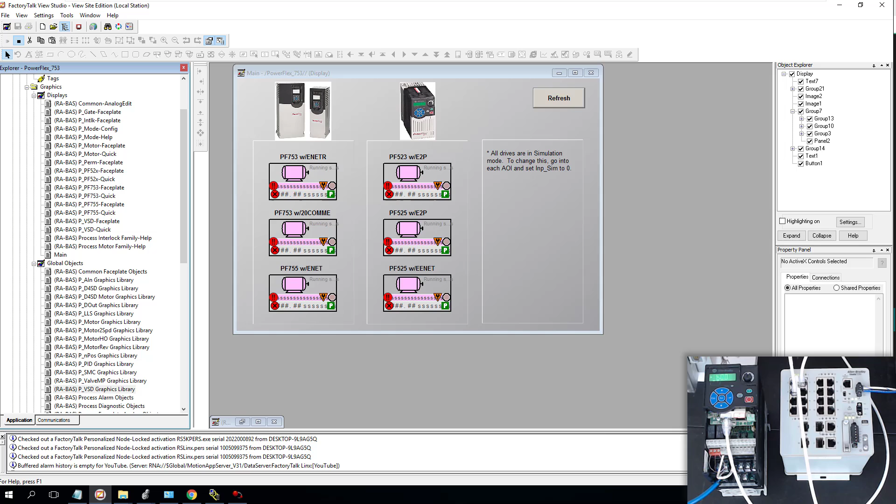So just to show you a couple different things, we're going to come into our program here and I'm going to show you how I synced everything up. Okay, so this was a demo that I got from PlantPAx, and I've tweaked it a little bit, but I've also kept it as the same thing you can get from Rockwell, and that way you can be successful at doing this as well.

So what I want to show you is I've basically disabled the rest of the drives that we were not using. I've tested it on a PowerFlex 755 as well, but I'm doing this now on a 525. Right, so the PowerFlex 525 that we're using, there's a couple different variations. We are using the EENET, so that is what the tag name is, and I want to show you how you get to sync this up.

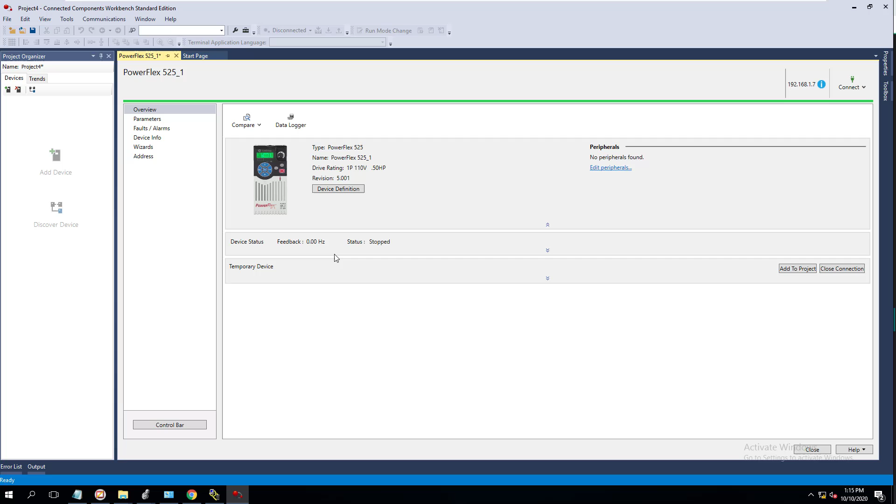And a small comparison that you might or might not be familiar with: in Studio 5000 Logix Designer version 32, if you pull up the actual device properties, you see it kind of looks like CCW, Connected Components Workbench. Why do I say that? If you've seen the last few videos I did, we actually set up this drive in Connected Components, and we do that because of the peripherals and the variations. So it no longer works so easily with Drive Tools or Drive Executive.

So now the program came in as a PowerFlex which is rated at 480. And of course, our trainer here is just a 110 trainer, right? So we have a simple PLC, simple 110 scenario, nothing fancy. So we do have a 110 drive. So how do I sync that up?

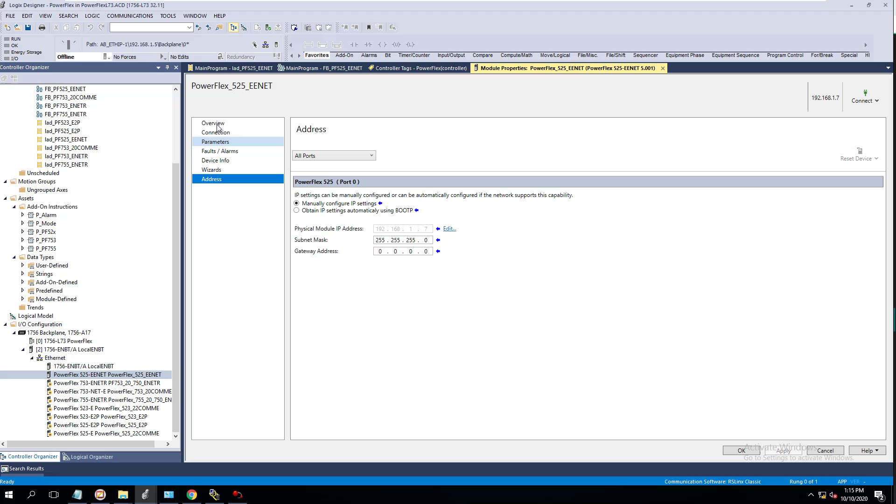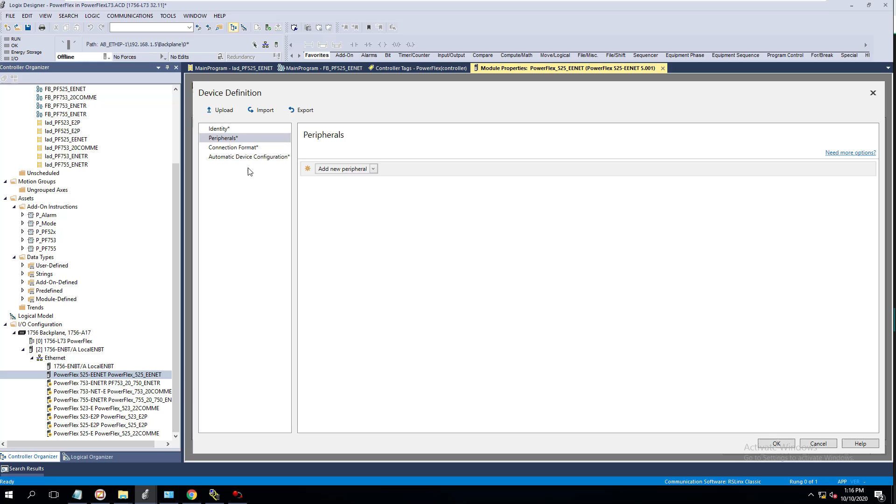A lot of people would think you just go in here, change a couple things, and maybe it would sync up. Well, if you go right here and you edit peripherals, you're going to go into peripherals and you can upload. So when you upload, this is when you connect, and this is how you drive match. Right now you have to do this offline; you can't do it online. But the cool thing too is you can enable ADC, which is your automatic device configuration.

Now you can enable this where, first you have to set up all your process directly into your ControlLogix processor, just like we're doing right now. We have to sync everything up, and later down the road the drive goes out, right? And we plug the drive in, and when we change the IP address to match the IP address that we have in our configuration, the program would automatically prompt us to download to the actual drive.

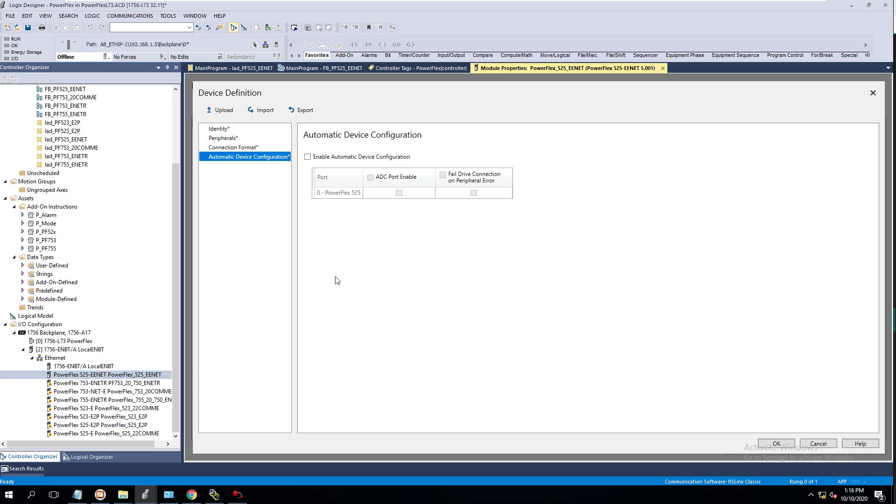Now we're not going to do all that. We just want to briefly talk about this and how to set it up, and definitely how to do the upload and import, export. That's pretty obvious, but I thought it was very similar, the look and feel of the way things are. Now I bring all this up to talk about the tag structure.

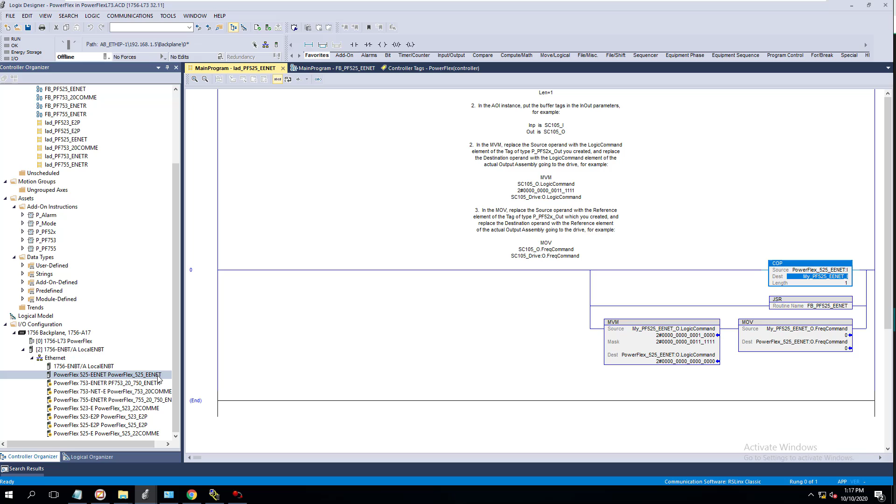Okay, so you notice the tag structure down here is PowerFlex_525_EENET, right? So the two files that we're going to be pulling up are the PowerFlex 525 right here, which is a function block, and this is to work with the AOI that works with PlantPAx. This is the PlantPAx AOI. Okay, so this is the name of the actual. You have to first give it a name.

This is the name that they currently are using, which is my PF525_EENET, right? And then they're using the data type, which is right here. Now, what is that data type? That data type is an add-on instruction that is implemented with PlantPAx.

So the rest of these, just note that this is your top level. This is basically your tag name or your device name for that specific device, in this case the drive. This is the drive's name. We can change that name if we want and name it something else, but in this case we're going to keep it the same name as what it is.

And the next section is the input and output. So the input right here is going to be a data type. Now this is just a data type. If you broke down your user defined, you could see your inputs and outputs right here. This is the user defined data that comes along with and works with this AOI. So I say all this to say that this is what's needed for the actual drive.

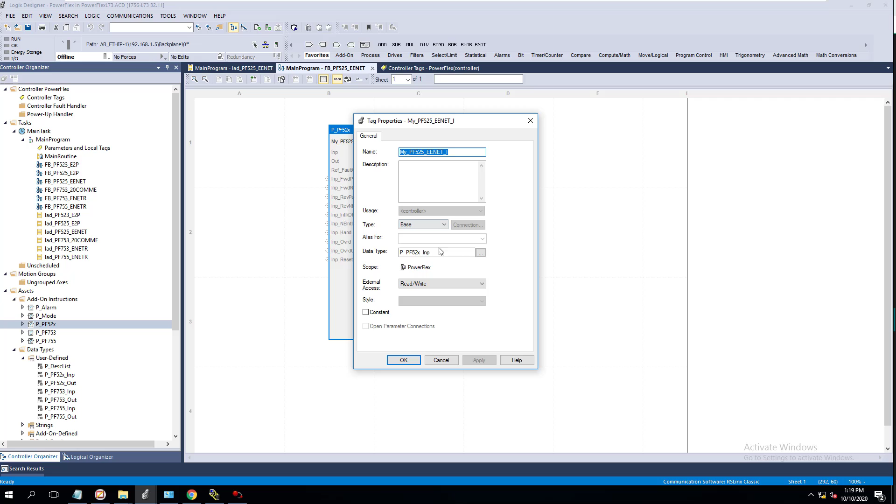Now, the reason the formatting is done the way it is: you have your tag name for your actual device, you have your input, right? You edit that, make sure you do your correct data type. You have your output, make sure you have your correct data type. And then you have your fault list, okay? Your fault list, again, is going to be another data type.

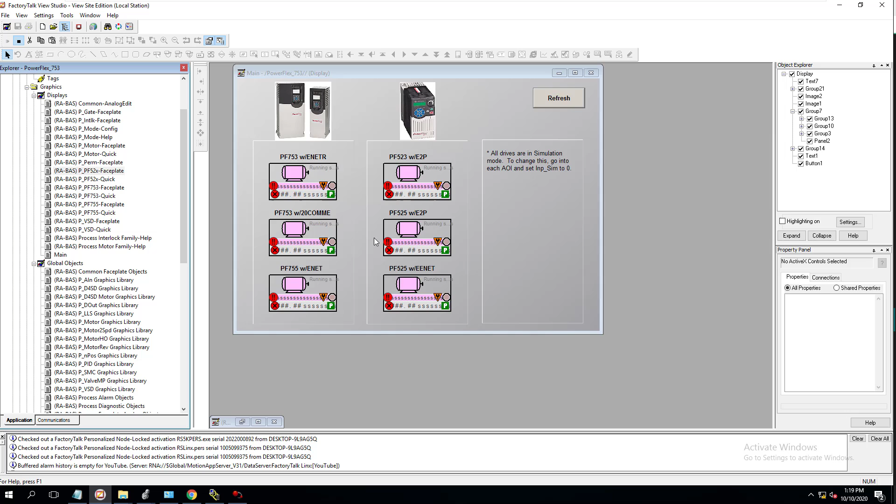Now, let me jump over real quick and show you how all this is linked together with the actual device, because that's really where the key focus should be. So how are we making this block talk to this drive, right? So that it can work with this block to make it work with, I believe it's this block right here, to make it work with this block, which I have down here.

So again, you have to understand how all this is working together so that you can actually get that functioning. Now, again, it's breaking down the components and understanding the way the structure is so that you can actually understand how to implement this to get this successful.

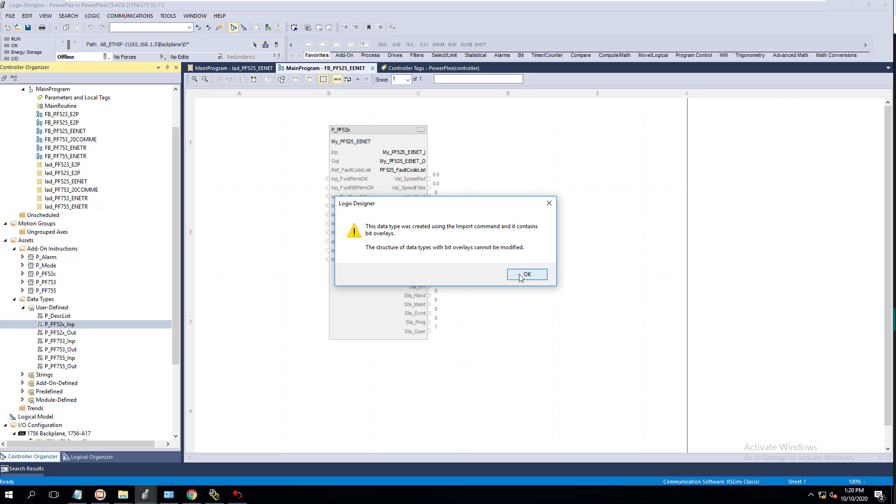Now, keep in mind, we talked about the two input and output parameters, right? There are the tags that we need. If we looked at this, we looked at their tag structure. This tag cannot be modified. That's all they're telling you, is it cannot be modified.

This is the tag structure that comes with PlantPAx, and you probably could hack it up some way and modify it, but I believe that works really, really well with what they have right here, and that's probably the reason. So if you look at this, there's supporting logic over here, supporting logic in this rung, which is a ladder logic.

Now, I bring this up for the simple fact of this tag right here, which is the PowerFlex 525 EENET, is right here. So you're going to copy your device parameter, or your inputs, your status word, into your actual tag that you made up here. You're copying that into there. That's where that transition happens.

And if you looked in your actual I/O and you looked in your tag structure, which all I did was open up my controller tags, you come into your controller tags, you would drop down and you would find where your I/O is. And how you would understand that is you could look at your data types over here, and you could see the data type. Now this is an AB PowerFlex 525, and it gives me the input and the output, right? So this is the drive status, right?

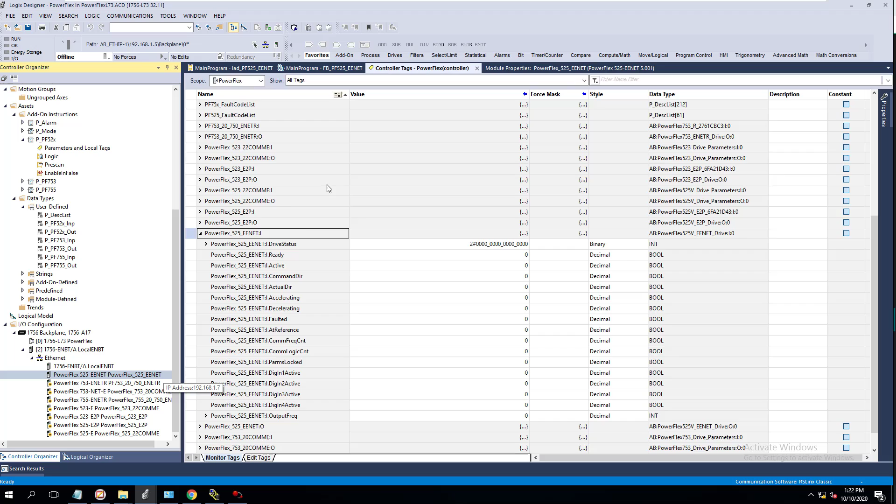And the drive status, right, that's when we synced everything together. When you see me pull that up right here, we synced everything together to make sure it was right. So you get that when you get the tags right here. You get your input and your output, two sections. Okay, so let's talk about your inputs.

You have your input word status, right? You have your 0 through 15, which is your 16 bits of input word. You also have your ready bit, your active bits, your command, your actual accelerating, decelerating, all of the bits you need, and your actual output frequency, which is basically in decimal form. At that point, this is an integer. You can see these data types over here.

The output word, again, that's going to be your command word. Now you can control a drive from your command word, or you can control it from your start, stop, jog, clear, and all the presets and accelerations and stuff like that. And this is also your frequency command, which again is an integer form that goes out to the drive.

Now, why do I bring all this up? I'm bringing all this up to show you the transition where all this ties in together, right? Because if you don't know where it all ties in together, then you're not going to be successful.

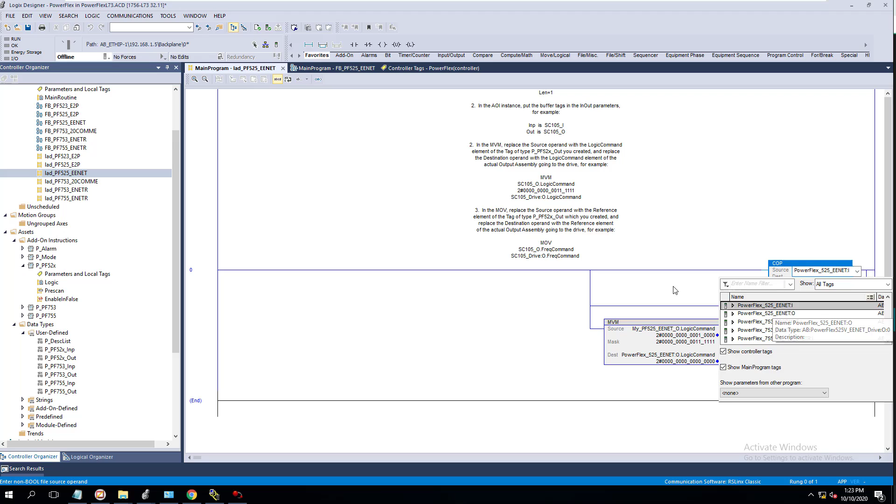So this line of code right here is very important because this ties in the inputs of the drive that we just got through looking at, ties in the whole input status to that my PowerFlex or my underscore PF 525 underscore E-ENET underscore I, right? So that's the tag we actually have in this function block.

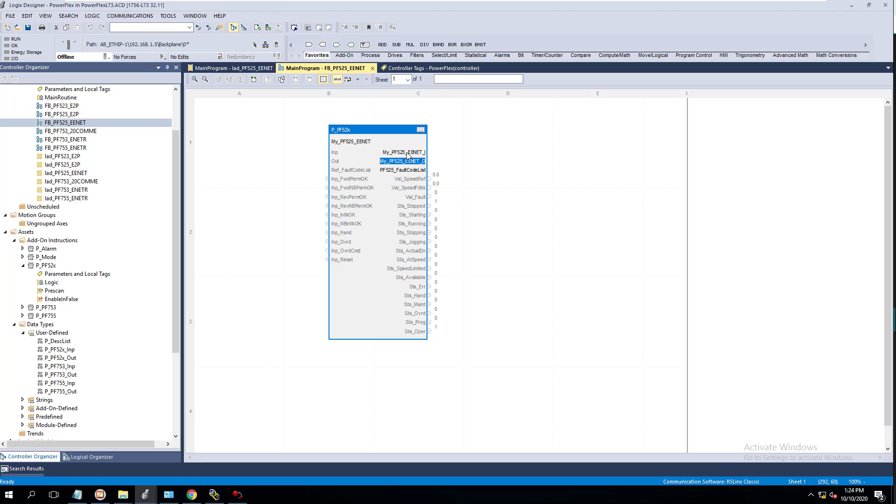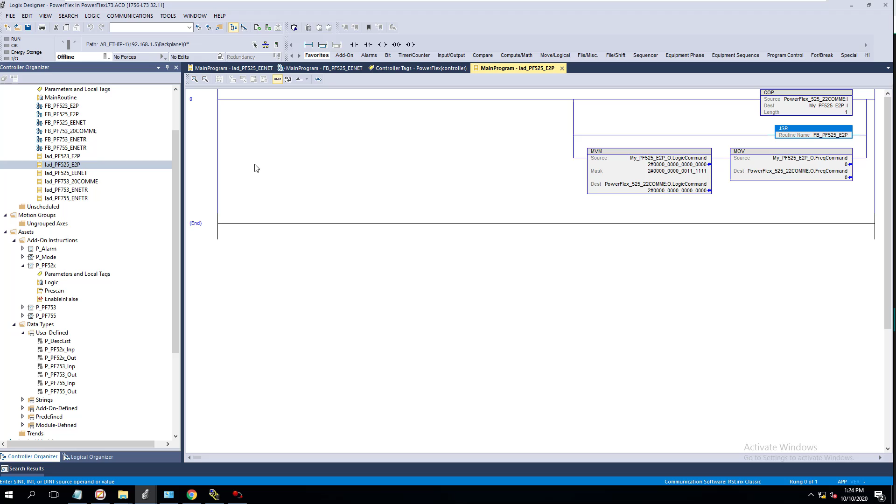So that's the tag we have right here in the function block. Now in the ladder logic, we're going to show you right here. This is just a JSR jumping to that, and I actually pulled up the wrong one, so excuse that. Make sure you pull up the right one. Again, you've got to understand they're trying to give you many examples right here. So this is the JSR jumping to that actual function block up here.

Now this is going to be your mask move. In the PowerFlex 525, you have to do a mask move, or normally you would just do a move. Like in a PowerFlex 755 drive, you would just move your word into the other word, right? You would move your command word into your command word, and you would move your frequency into your frequency, just like they're doing here.

But in this scenario, they're doing a mask, and they explain this in this situation up here. Basically, they're talking about a mask move, and the reason you mask move is broken down in the documentation of the actual drive. But in conjunction with this, all a mask move is, is just a filter. So what are you paying attention to?

In this case, what we're paying attention to is bits 1, 2, 3, 4, 5, and 6. So in this instance, all we care about in paying attention to the mask, or the command word of the drive, which is the start, stop, reset, clear, and all that, is the first 6 bits, right? So think about that. Now that's in the command word. So that's completely configured differently.

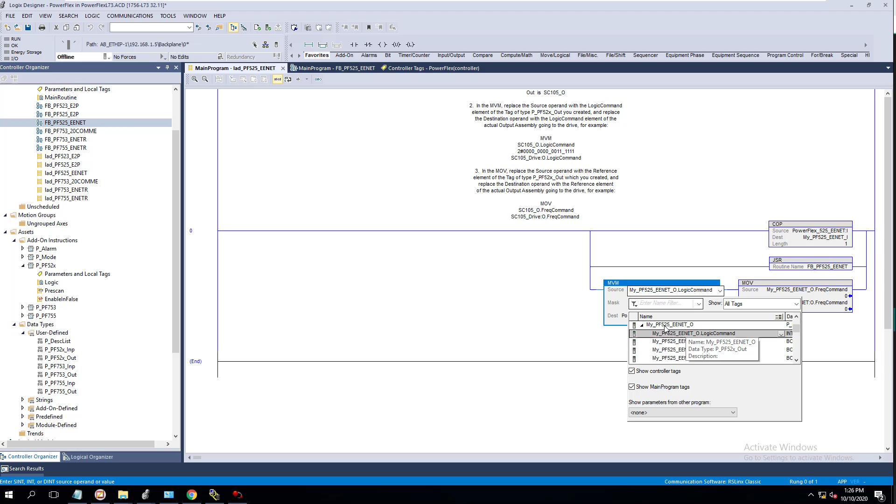So I say all that to say that when you're doing this, the output command, right? If you look at this tag, this is getting the output command coming from your function block over here. So if your function block is right here, this right here is going to be your logic command. That's where you're getting that, you're getting it from that tie, right?

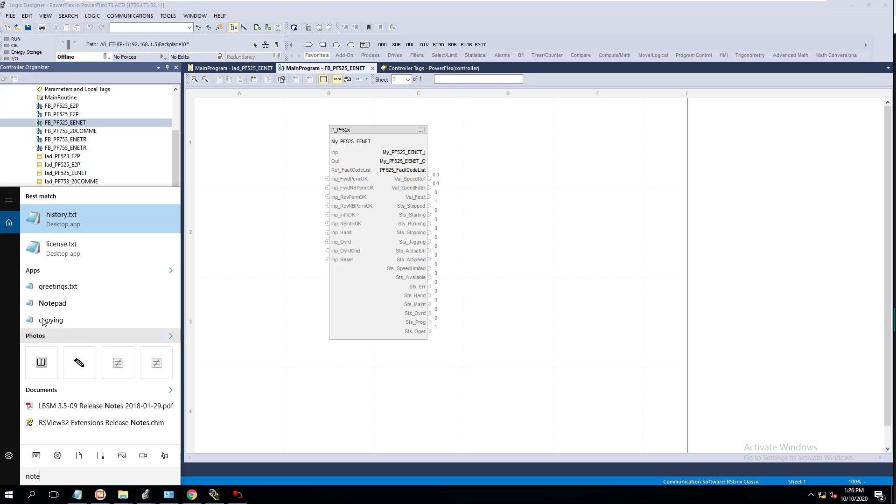So if you think about the way things were talked about, and you think about the way things are, now how are we getting our connection? Now this is very important, and I know a lot of you guys may already have this, and some of you may not, so I want to make sure that this is 100% clear.

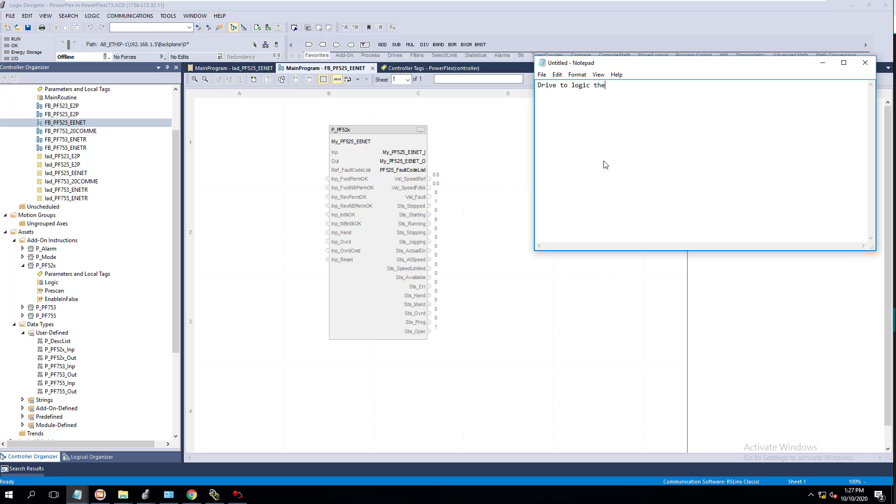So your drive to logic, then to HMI, right? Understanding the way that the tie works together, so in our case, we're going to the I/O, right? The I/O to ladder logic to function block to HMI.

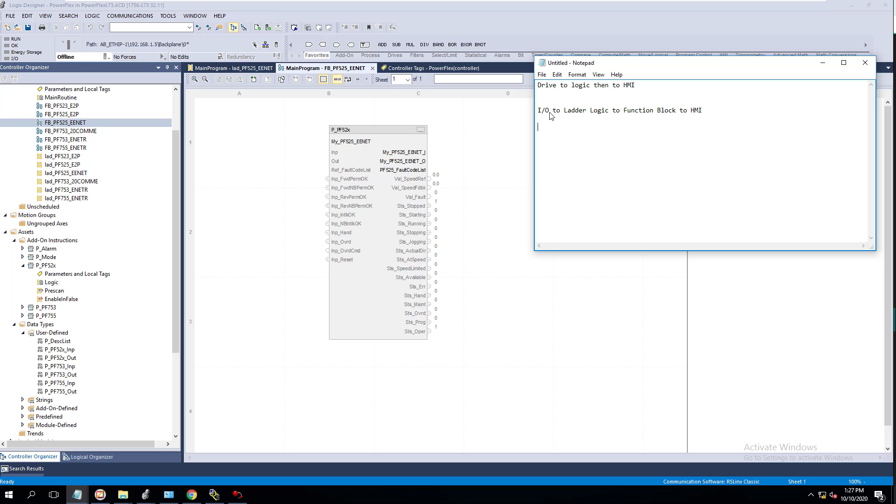And I'll explain this, this is the reason why I wanted to actually talk about it, because when you spell it out like this, right off first glance you're like, well, that doesn't make any sense. But it does. If you think about the way everything we just talked about, the ladder logic ties into the I/O, which is down here, which is our drive, which ties into this function block, which ties back into the function block, makes the tie back to the actual drive.

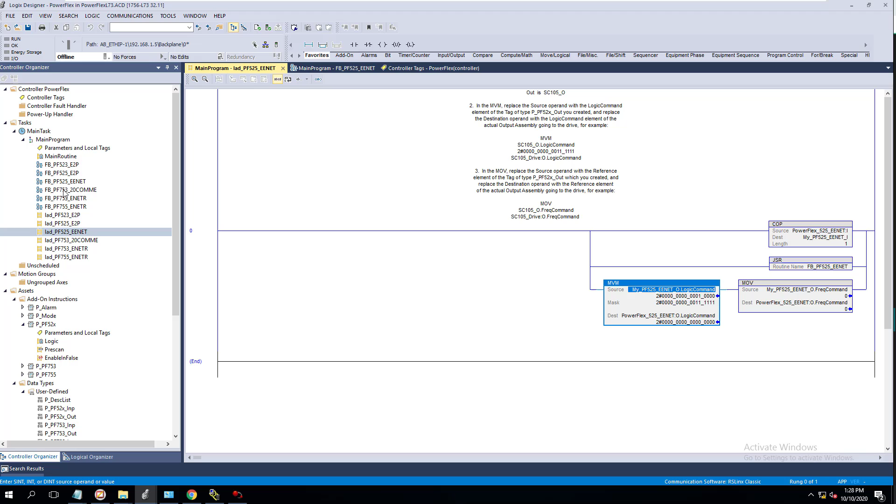Then that talks to the function block, which is what talks to the actual HMI. Okay, so let's actually download this so you can see some action.

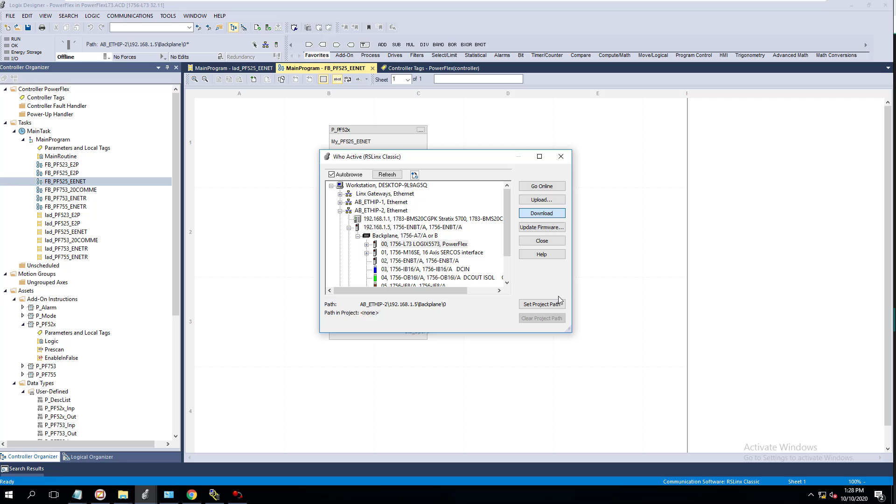First and foremost, we're going to come in here and download this to our application, which is right here, and we're going to download it, and then actually run the application. I'm going to show you the way the application works.

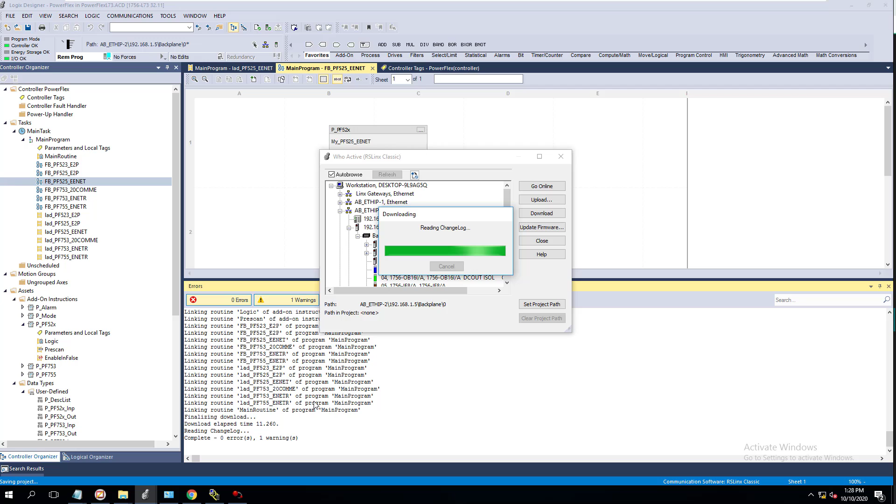Okay, so it's downloading right now. You can actually see the drive is faulted out, but no worries, we're going to reset the drive when we crank up the HMI, because it will fully work with PlantPAx. And that's the goal here, to understand how you're doing it, but also to get it working.

So with all this said, now we have our program in here, we have our drive. Now what we need to do is come into our HMI system over here. First and foremost, you need to make sure your communication path is right.

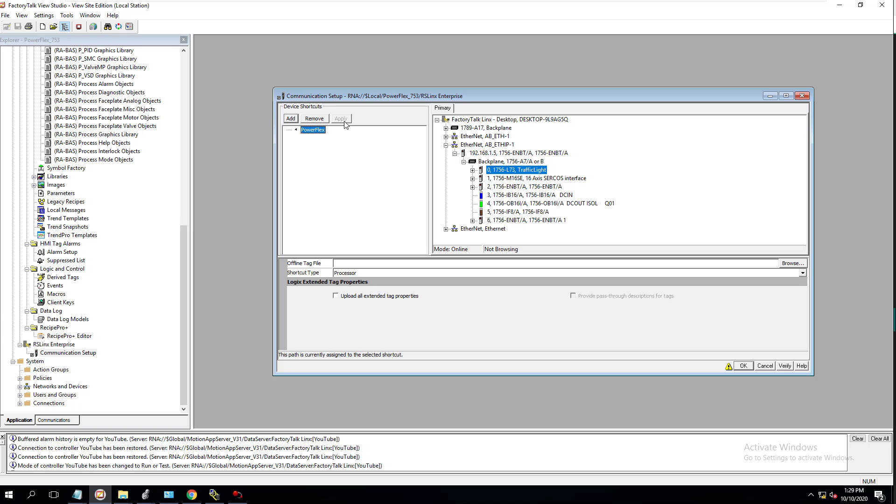So our communication path, again, we set our shortcut is already PowerFlex. Our communication path is going to be right here, which in our case says traffic light because we did another trainer on traffic light, but sometimes there's a little cache in there that keeps that. No worries, it doesn't matter. You just hit apply right here and make sure you verify this. When you verify it, make sure the path is right and hit OK.

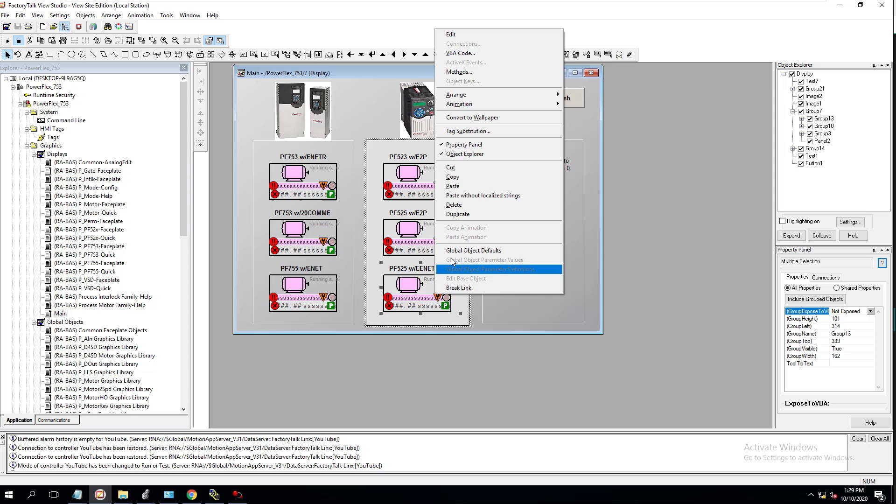This gives you the ability to sync this up. So say if I wanted to open this up and come in here and actually replace a tag, like a tag substitute or something. If I wanted to tag substitute one of these, then I could come over here and refresh the tag, and then my PowerFlex online would come in, and you could see I can pick from my tag database.

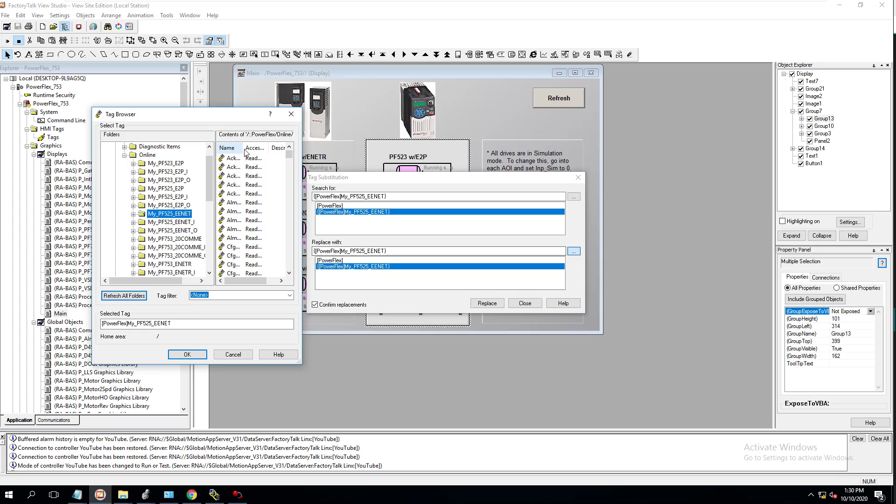So in this case, my PowerFlex, my underscore PF 525 EENET, this would be right here in this case, and then that's what it's actually looking for, right? So that's what we would put. Now I'm just showing you an illustration because I've already done that. I'm trying to show you the connected pieces and connected components so that you understand the way this works.

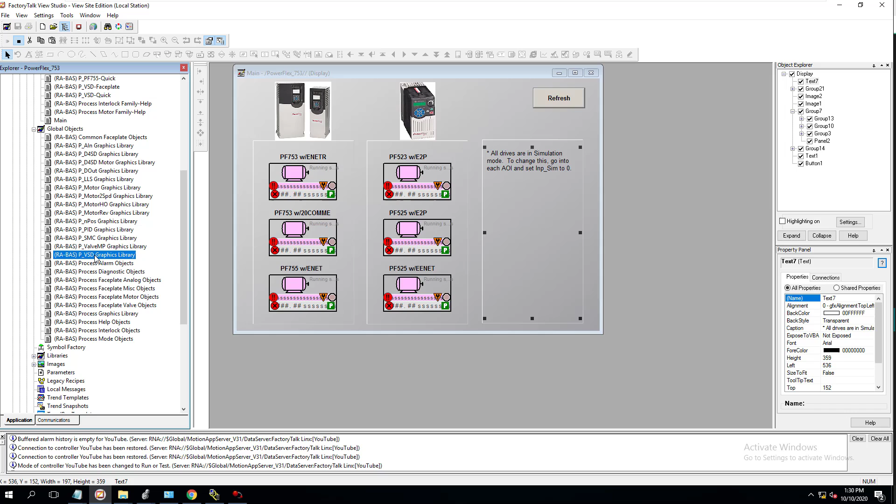So you're probably wondering, well, this was pre-done, so how does that work together? Well, that's a very good question, because you come down here to your P_VSD Graphics Library. This shows you the breakdowns, okay?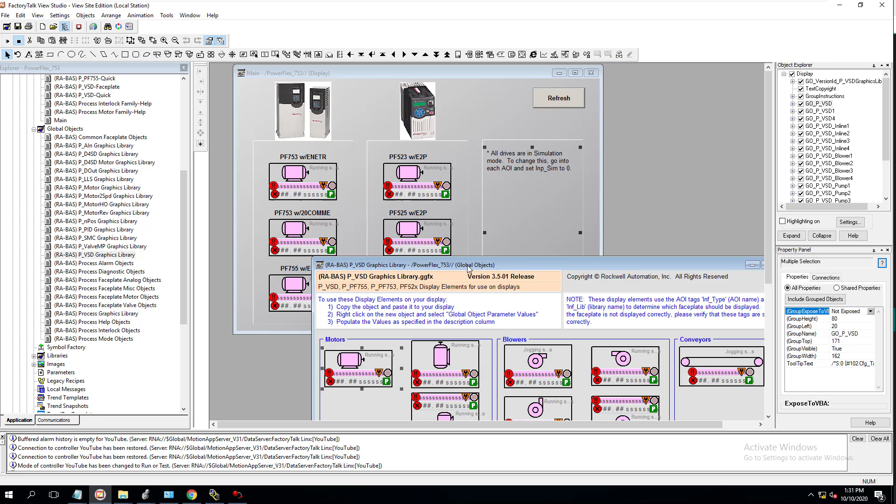And this is actually the PlantPax version 3.5. So if you really wanted to see the version of what we're actually working with, it's 3.5. The same thing really applies to 4.1, except I believe in 4.1 they added a message instruction inside of the PlantPax. So this is the one we're currently using.

You can look at the definitions again to see what these are and see what you need to change out. So if we broke this down and went in and looked at it, global object default, you don't have the ability to change this, so we need to get to that ability.

And it's not edit, because that's not getting to that point. This actually shows the parameters right here. You see that? So the block is what you were looking for, right? So this shows you that we're only utilizing these.

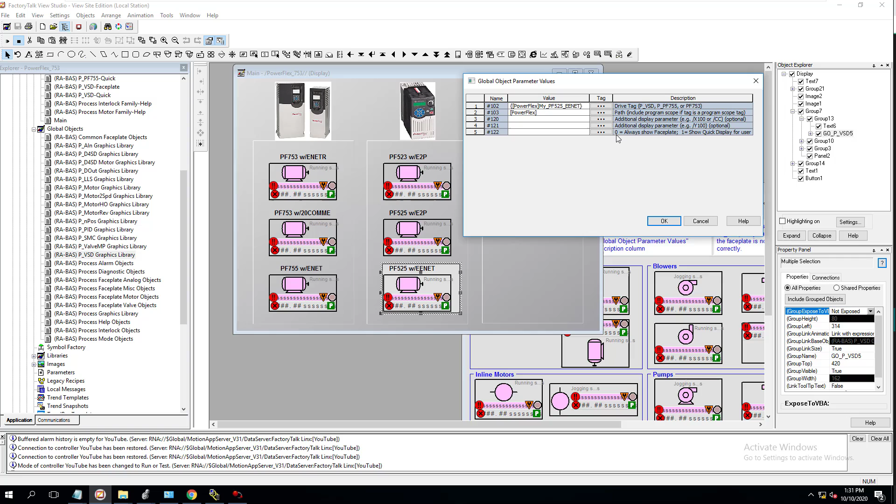And now, say for instance, I want to say 0 down here. This would be 0 down here. I want to always show the faceplate. So that would be where you load these in. These are kind of layered. So if you think about it, this is just like this.

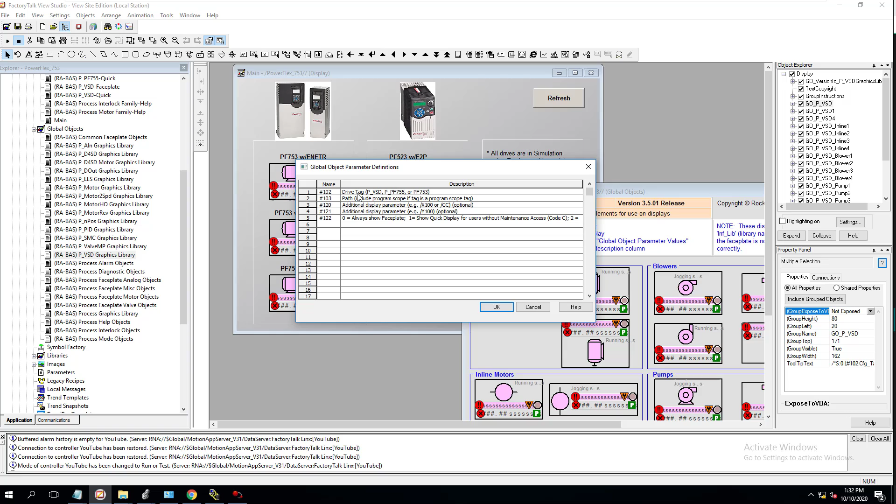This is where you would load in your parameters. And your parameter definition, that's where we got it right here. So we understood our definitions of what we needed to put in the drive or in the component, the actual global object. We understand what we needed to put in here by the parameters that we're seeing over on this side.

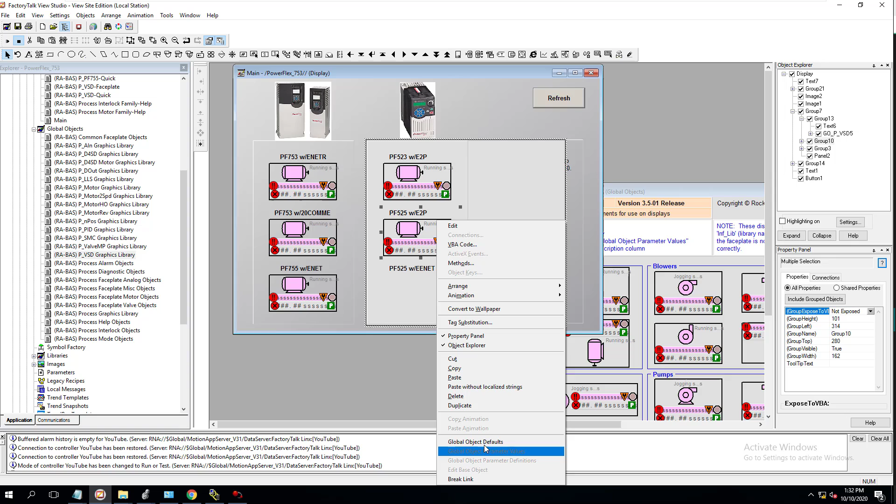Now, in doing so, this screen over here, we have to understand the breakdown of it. So if you just pop this open, you just right click this and this is not there, it has to be a layer deeper. So just hit edit one time and then you can see that this is pointing to a different drive. Okay, so I'm gonna actually undo all this because I want everything to be working correctly.

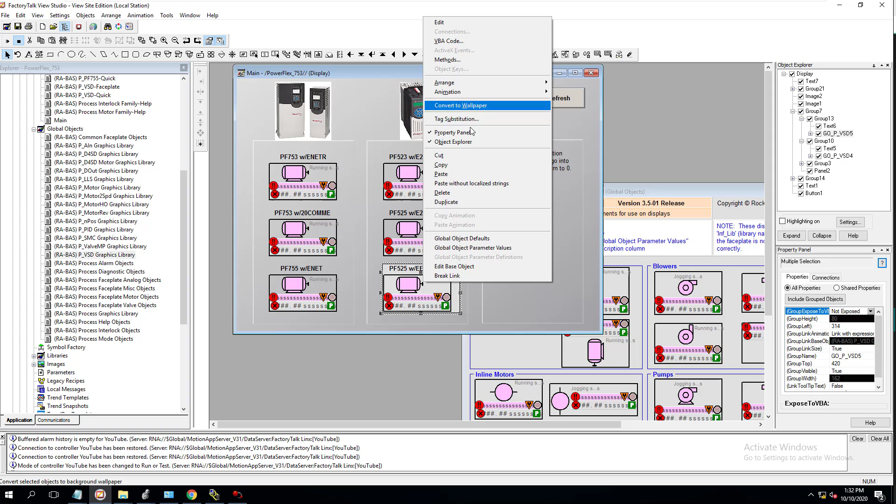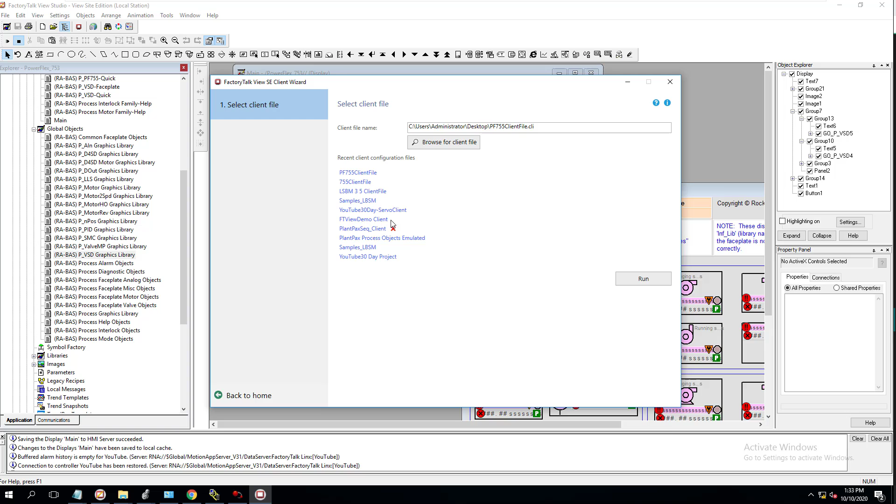And what we're going to do is, now that we have an understanding of how we have everything tied together, I've made a client, and I want to actually run this client. So let's first save our screen. Let's go to our client. Let's run our client. I've made the client to save time so that you can easily see this. I'm going to show you the drive is currently in a fault status because we downloaded, right?

So when you download, you naturally fault out anything that's connected with CIP motion or CIP connection, and this drive is connected. It was owned by the actual processor. So if the drive is owned by the processor and the processor changes states, yes, they have the variability to fault out. Now again, you can set different components to reset and have things work completely different.

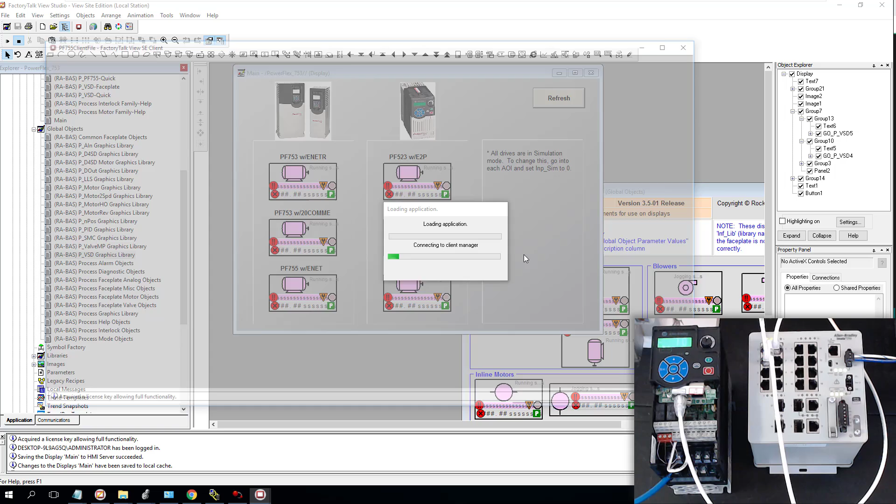But in the instance that we have, when we download it, it'll cause a fault. That's really what I'm trying to break down. That doesn't mean it's going to happen every single time, because we can change the way the setup is. Okay, so now that we have everything here, we're not going to worry about this because we're not connected to that. But we are going to show the PowerFlex right here, and you can see the fault code right here. So it says heatsink, which is the fault code that's showing.

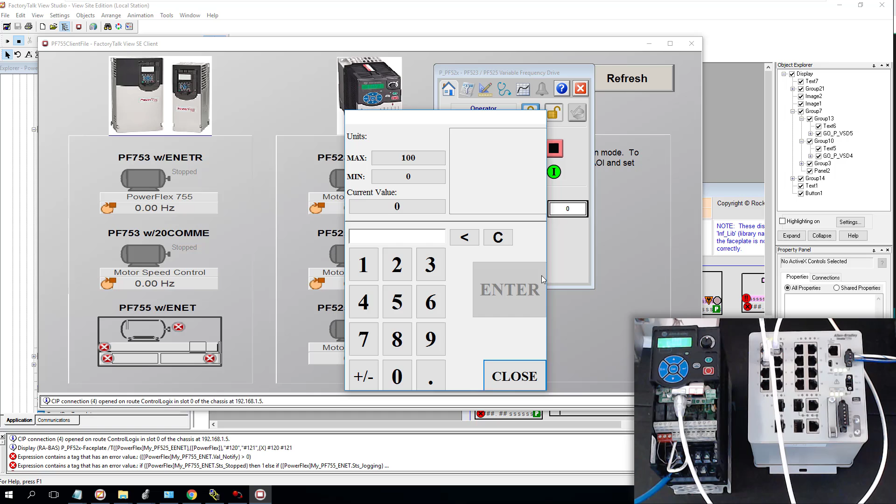And we're going to reset the drive. Now I'm going to show you that we can start the drive. So I'm going to enter in, let's run it at frequency 25. Now, if you notice, the drive right now is not running, but it is reset. Okay, so now I'm going to actually hit start. The drive starts running. It ramps up to its speed. So now our faceplate's actually working with the actual system, right?

So if we looked at this, we can go over here and look at all the parameters and make sure everything's working accordingly, right? So we can change the accels, decels and stuff like that if we wanted to. I mean, there's so many different components to this, but you can see the trend is working, and it's actually running at 25 right now. Again, that layout, I need to actually disable this and put this on the front.

I actually fixed this because my ActiveX was slightly different, so I changed the graphic. So naturally you wouldn't have this overlay right here. I'll open up another one just so you can see it. There's naturally a different thing that pops up right here, but the ActiveX is different. So what I did is I changed that to a numeric display, for the simple fact of being able to do this edit, break down and show you the components behind it. I wanted to show that working.

And I actually have 4.1 running on the system as well, so I didn't want to interact with 3.5 being off when 4.1 PlantPAx was something I'm going to actually do some training on as well. So you can hit stop and it would stop. Now again, you can see it's changing color, it's doing everything, and we can go to operator, change the operator status. You can come in here and change the commands.

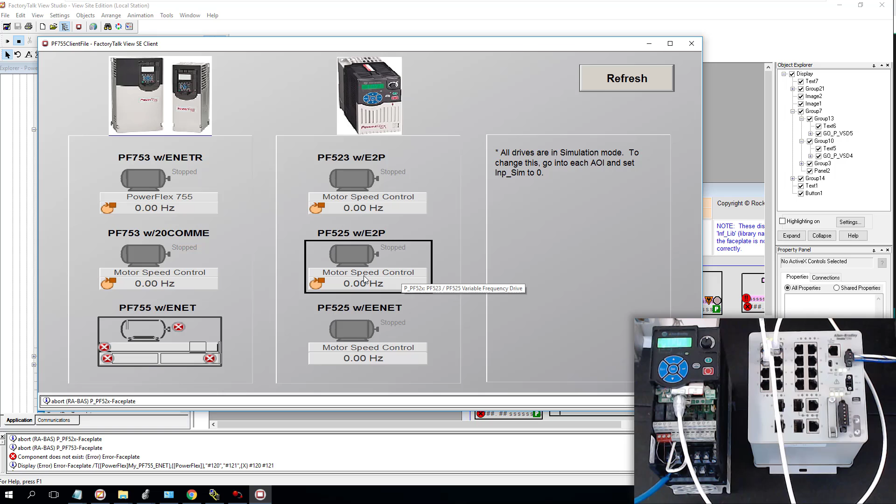In this actual application, there's a simulation. In the PlantPAx, the reason the rest of these drives look okay and they're not just a red X like this one is, is because I actually had this one attached to a PowerFlex 755. In the application, you have the ability to actually do a simulation test. So if I ran this right now, I'm not connected to this. It's not actually connected to a real device.

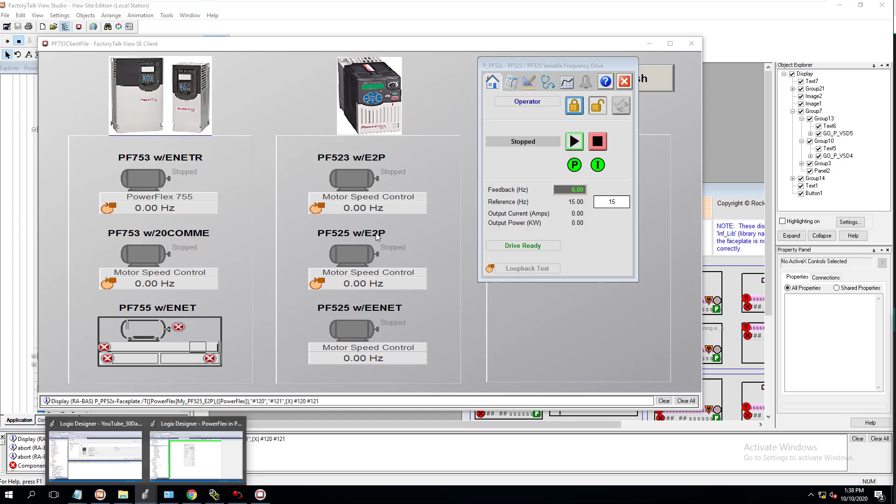It's in a simulation. Well, they'll tell you in 3.5, in the PDF for 3.5, how do you cut on and cut off the simulation? You would think that there would be a button right here on the screen that would be easily accessible. You actually have to go to a specific bit. Let's just say this is the PowerFlex 525 with E2P. Okay, so if you went into this, you would go right here.

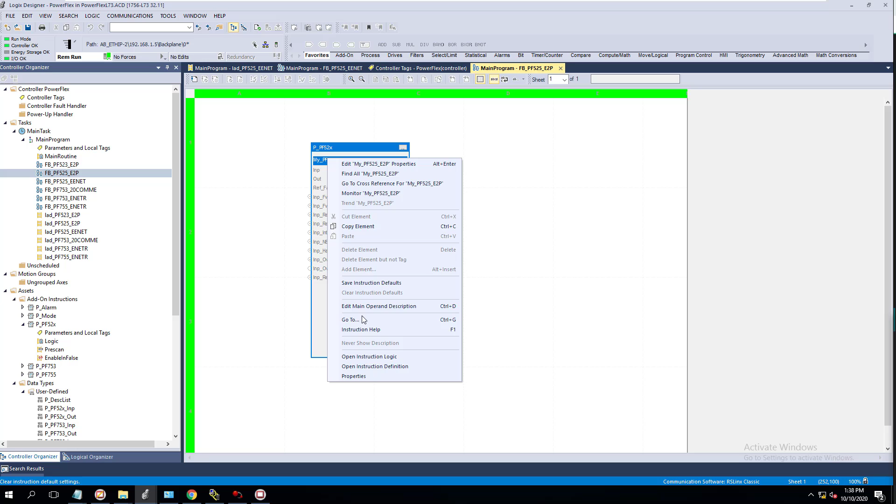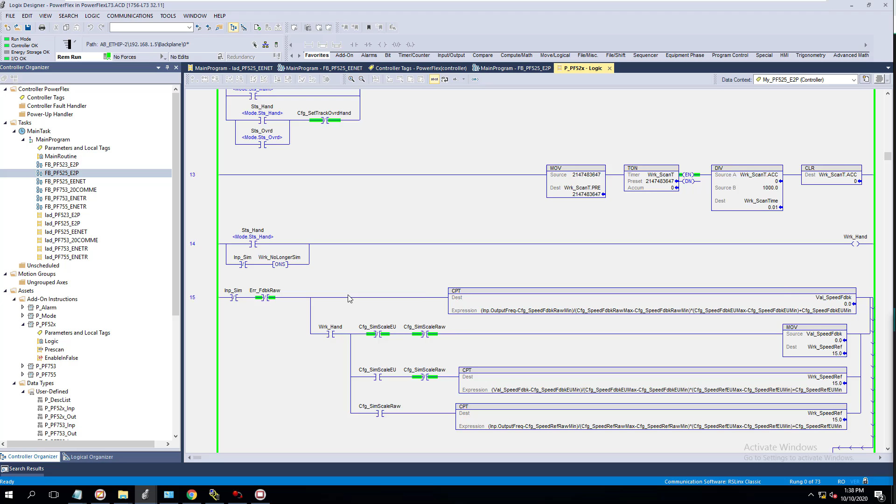Now I would go here, I would open up the instruction logic. I'm going to show you where this is. So we're going to scroll down, because this is real logic, and you see this, there's a simulation bit in here. That's what they're using. So I want to show you this. This is in simulation right now.

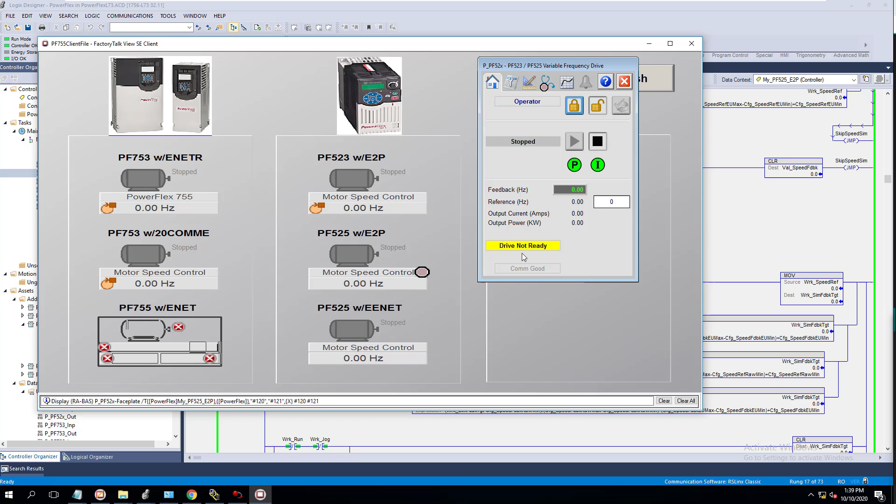Now if I change the status, if I toggle this bit, this is no longer in simulation. You see it went into drive fault. So there's a way you can simulate logic. There's a way that you can simulate your blocks to make sure your tag structure is right, make sure your logic is right, make sure everything is working, and the only thing that is eliminated from this situation is your

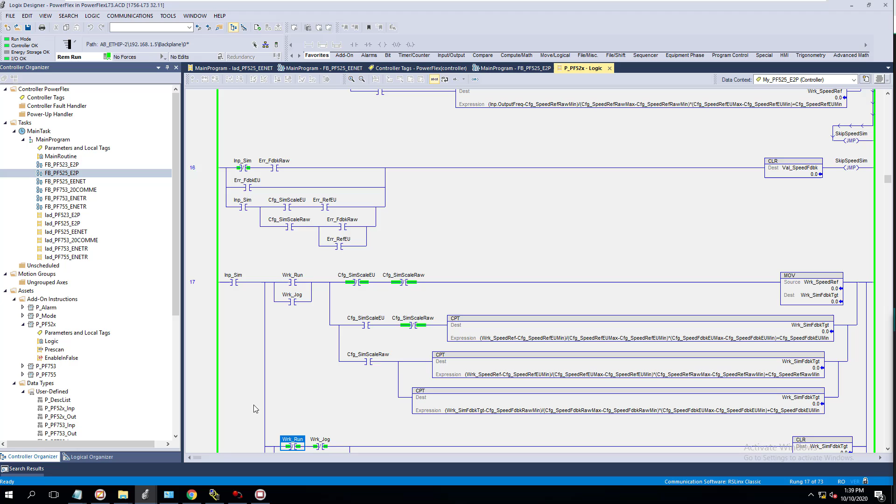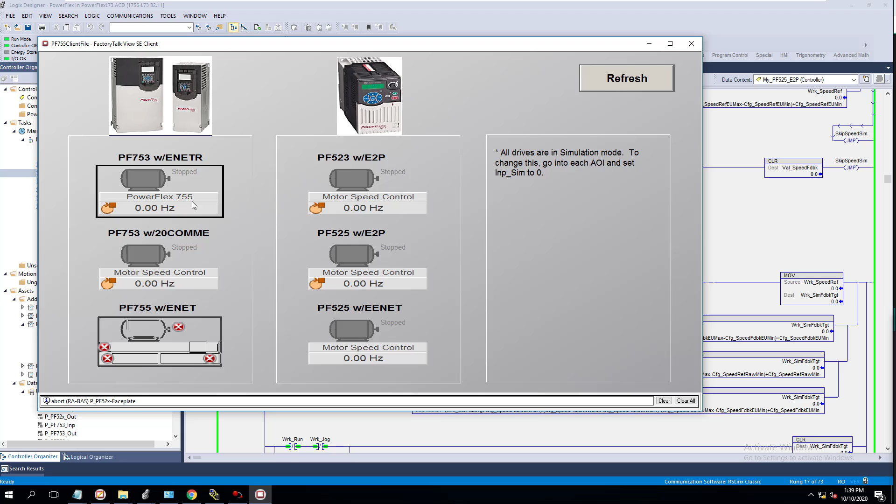device, your hardware. Now, hopefully you guys stuck around and actually heard that, because there's a little trick to that, is you have to toggle that bit. And they tell you that in the PlantPAx module. So coming back, I can test any one of these just to test the actual bit. But they tell you right here, okay, all drives are in simulation mode.

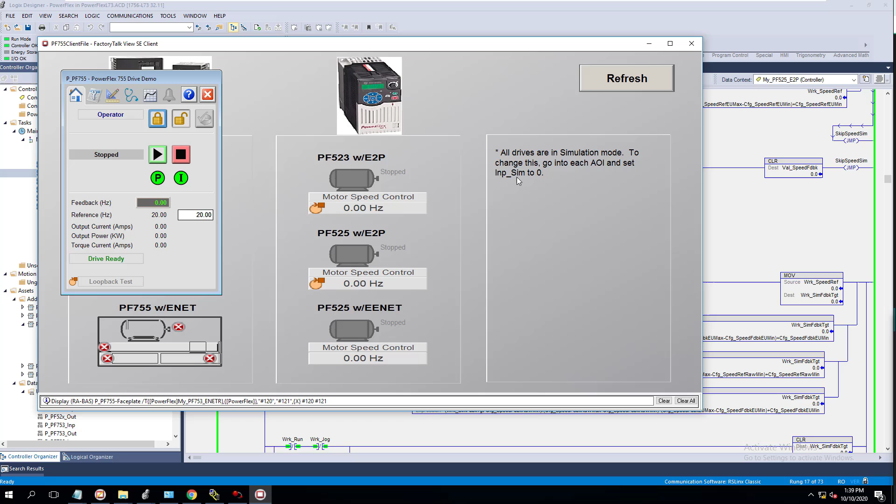To set this bit, go to each AOI and set the inputs, I call it the input simulation, which is really what it is. But they have a little acronym they put, and then set that to 0. All I did was toggle the bit, just like you just got through seeing. And when it's in simulation, it has this little, almost looks like a loop, is what they're trying to implement, like loop test.

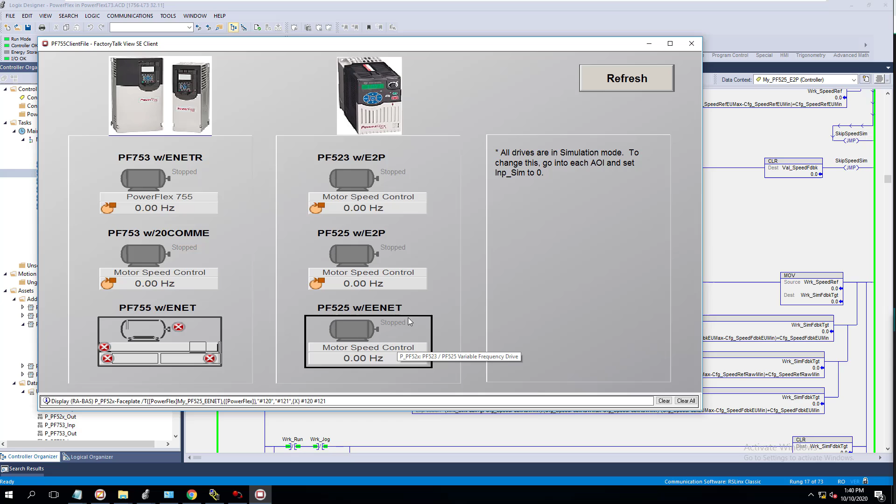And what they're doing is giving you the ability to actually come in here and test your situation without having to do that. But in our case, we actually did hook up a drive. Okay, so I'm going to run it again. I'm going to pull it up. I'm going to let you see that it is running. Okay, so it is running. See the running status.

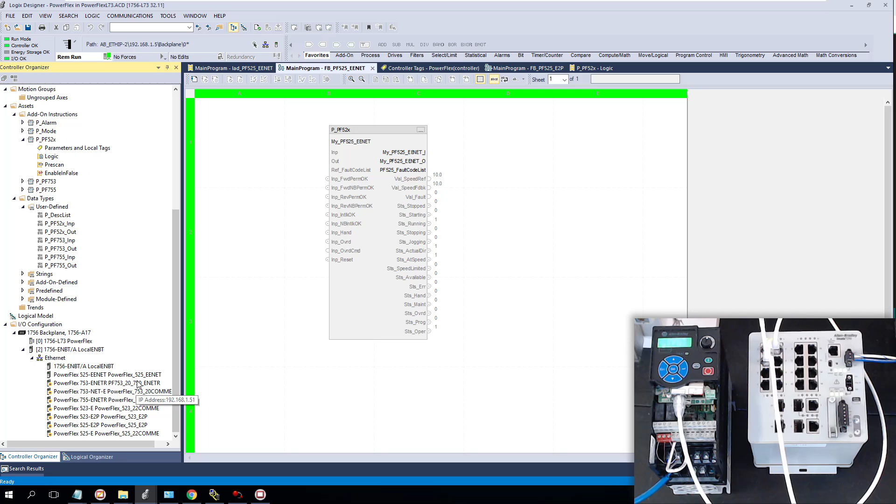I can come in here. I can look at my drive. If I look at my drive word, my actual word is a 1. It's running. I'm sorry, my word right here, my command word is commanding 4. It's on. But you can see the actual status right here. The output is forward. The frequency command is 1000, which is 10 hertz, right?

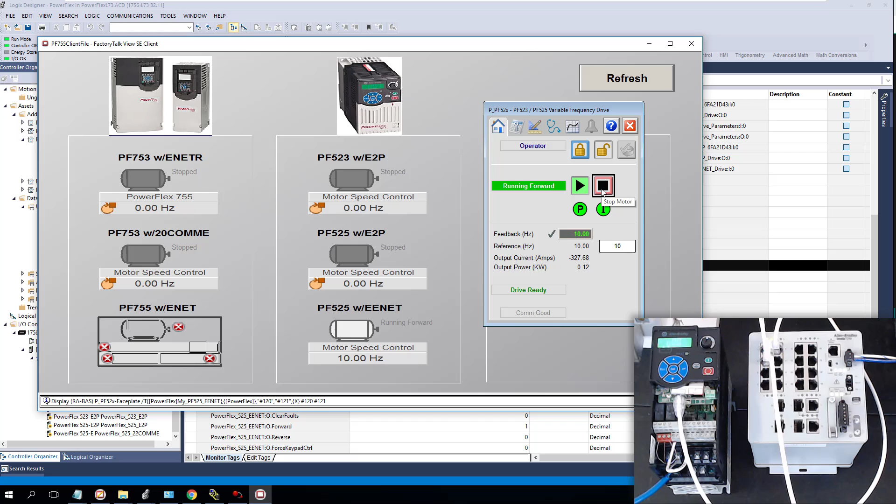Then my input status is the drive is ready, it's active, it's command forward, it's command direction, right? So it's active. So let's see if we can change that. I don't think this is set to forward and reverse, it's actually not. But we may be able to change that in one of the parameters or something. Come in here, and it might be, I don't believe drive can be reversed right here.

So let's stop it. Stop right here. Let's go right here and come back here. See if we can't check that box. Drive can be reversed, and you can see now it can be reversed. So if I swap it, now I'm going to go the reverse. So now it's actually going to go reverse of what it did. So you can see all that working properly.

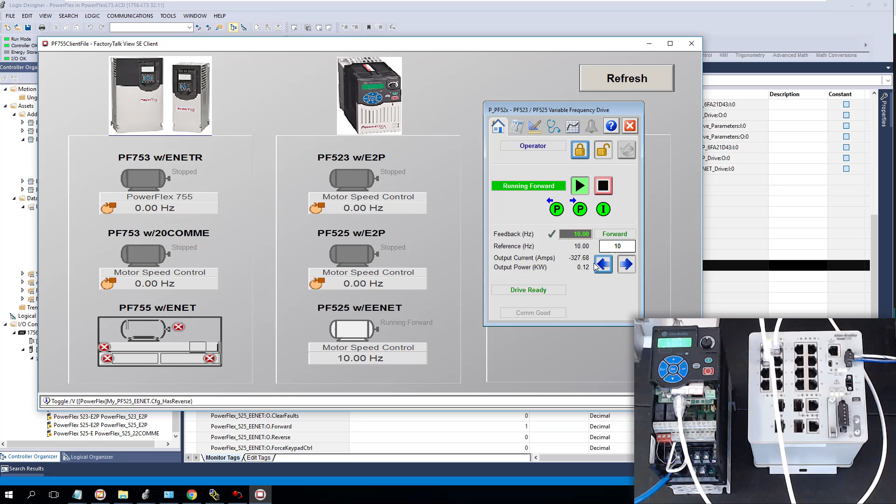So I just wanted to actually show you that, because again, when it comes down to it, let's actually look at this. It's running forward, running reverse. Let's actually run it reverse, and let's look back here and make sure it worked properly. So we're going to look at our direction,

command direction right here. This is all actually working like it should, because the actual command direction is 0, and that's proper. So if you actually stopped it and commanded it forward, this would be a 1. Okay, so this bit would be a 1, just like you see right here, right? So that's a good indication of how flexible and how durable the PlantPAx application is, and how things tie together and work together.

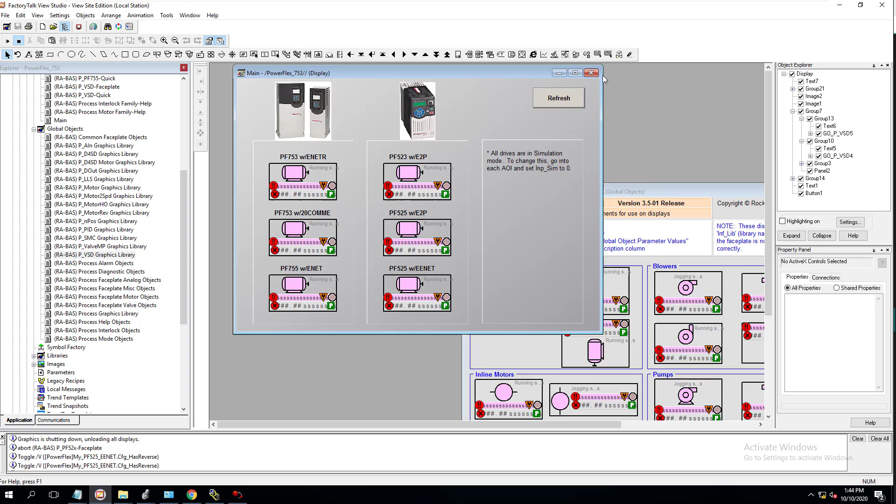Now again, this is version 32, so I will warn you about that. There is no backing up from version 32 to version 20 or anything like that. This is PlantPAx, so this is a local application, and this is PlantPAx version 3.5. So I will highlight that and notate that in the actual application and in the actual download section.

And for those that aren't members of this channel, hopefully you got a lot out of this video, and you can go back and watch it again and see how maybe you can go back to Rockwell and get the files from them, and then actually implement this yourself. But again, for those who do have the files, you can actually implement this and be successful with this as you want.

Now again, coming back to that, I believe you can actually run this on an emulator. I've done that plenty of times before, so you don't actually have to have a processor. So don't feel like you need to have an actual PLC processor to do this. I have an L73 that I'm currently running, and an ENBT that I'm actually communicating through. You can actually do all of this with nothing but code simulation, just do all of it through emulating. You don't have to have any kind of PLC or anything like that.

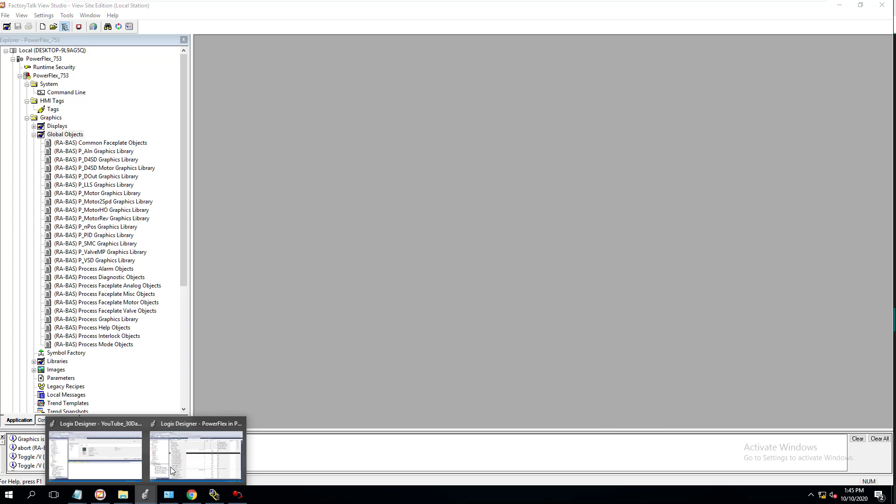Now, it's beneficial if you do have the components, but hey, we don't all have it. At a certain point in my career, I didn't have everything. I had to emulate everything. I had to simulate everything. And I honestly really feel that you learn a tremendous amount more when you have to emulate something than when you have to simulate it to get it working properly.